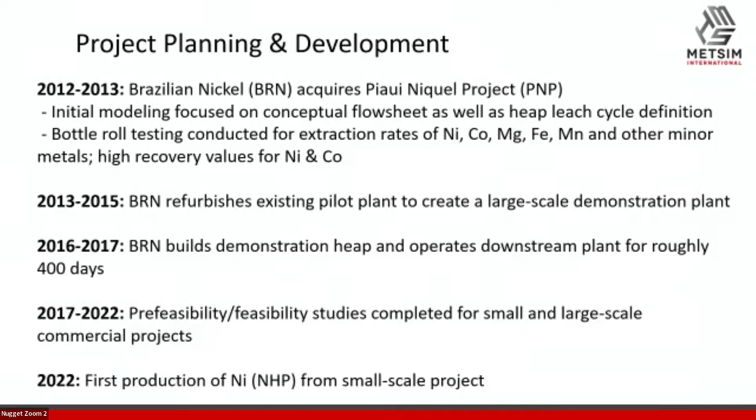And then really exciting news, just 3-4 months ago, first nickel product is NHP. If you're not familiar with that acronym, that's nickel hydroxide precipitate, coming out of a small scale project. So you can see 10 years in the making there, probably right on par with most of our activities.

We've got nickel. So conceptual flow sheet, hopefully that's showing up well enough over there. And yeah, that shows up okay also. Ore handling. So this is the ore handling agglomeration, added sulfuric acid and water, and then stacked it on the heap. Again, 3 different modules, about 10 tons. Next to the heap, ILS, PLS ponds, top them up with water. Sulfuric acid is necessary. And then the PLS.

PLS would pump to impurity removal, mostly looking at iron, aluminum, manganese. So bring that pH up a little bit, drop as many of those impurities as we could while not obviously dropping out nickel and cobalt. Solid liquid separation to get rid of that solid impurities.

Down into ion exchange, separate the nickel and the cobalt, and then each of them went to their precipitation stages. So once again, pH adjustment, precipitate NHP, CHP for cobalt hydroxide, and then send the solution back to raffinate. So fairly standard flow sheet in that regard.

Here is a good aerial photo of the site. This was probably 2014, 2015 when the heap was being constructed.

I see Carlos enjoys that. Probably some good memories for him. He's also up here from Brazil, so welcome, Carlos. We see right in the middle of the screen, and I apologize if you're on that side. I just have a tendency to go that way.

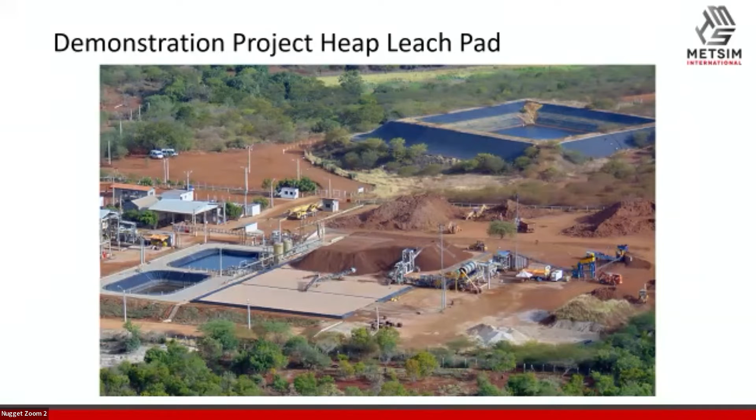So that heap leach cycle that we talked about, this is where a lot of the initial modeling was focused. How are we going to leach this so that we can maximize nickel and cobalt and minimize everything else that's going downstream, right? If you're running a precipitation plant, the more acid that goes down there, the more other dissolved metal that goes down there, the more reagents we're having to buy. So what can we do to minimize that?

Step 1, let's neutralize. So we take the fresh ore after it's stacked and take the most mature solution out of the ILS pond and leach with that. That would be non-acidified. Purpose of leach step number 1 is, as the name denotes, neutralization. We're looking to remove all the acid if possible. And if we're lucky, we'll even precipitate a little bit of iron if we get that acid down low enough. Lower acid, lower iron, less lime downstream. So it's a win-win there.

Secondly, then we'd focus on the primary leach. We would again pull ILS, except this time the ILS is acidified and pretty strong, 50, 60 gram per liter. Those that work in copper heap leaching have no idea what that would look like. So pretty strong stuff. And that reports right back to ILS. So a closed loop on the primary leach. Follow that with a secondary leach. We're pulling from raffinate now, again acidifying, 50 to 60 gram per liter, basically leaching everything that we can, sending that into ILS. And then a wash.

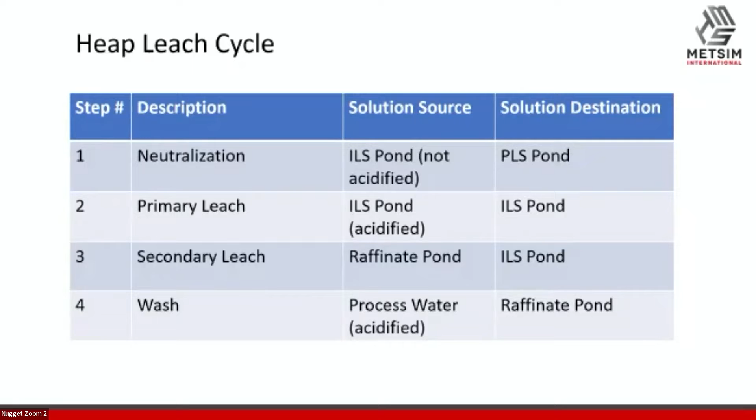If you're familiar with nickel laterites, a lot of people think they shouldn't be heap leached. I remember when our colleague Anne Oxley said they were going to heap leach a nickel cobalt laterite, I said, you're going to build a giant swimming pool. But what that means, there's a lot of residual moisture, 22, 25, 26%. I think we even saw at some points dynamic moisture during the leach cycle. What that means, we've got a lot of dissolved metal in inventory. So process water wash, 5 gram per liter acid, just to keep that pH down. And that would then go into our raffinate pond. So ran that leach cycle on, mostly adhered to that leach cycle for heap 0, heap 1, and heap 2. Heap 0 was a bit of a trial to get us started there.

So we take all this information and we need to put this into a model. It is a flow sheet model, which means we have the main unit operations, the main flow streams, the main chemistry. But what we started with is the ore. Let's get the tonnage right. Let's get the metal and mineral grades correct. And because it was just 10 tons, we were able to very accurately separate and identify what the mineralogy was being stacked. And again, heap 0, heap 1, heap 2, 3 different magnesium nickel ratios, really, so that we could sort of see a low, medium, high, if you will, what we expected from the mine plan. And that'll be important as we move through the model.

Bottle roll test results, we were able to curve fit and get some extraction kinetics, and we'll start with there, then change those as we go. Complete flow sheet, as I said, including individual heap leach drainage streams. We've got 3 active modules, each with its own drainage stream in practice. Within the model, we had a drainage stream also for each module.

Heap leach parameters, the leach cycle I showed, drainage rates, 22 to 26% dynamic moisture - we had to take that into consideration, so we built that in. Then process chemistry from the heap, we're going to focus on that a lot in the coming slides. Impurity removal, product precipitation - that chemistry was controlled by solubility tests, basically solubility versus pH that we'd run at the lab. The 2 last statements in bold are custom algorithms.

That's really what we're discussing here. This is what makes this project unique from a simple simulation model, for 400 days of operation. The modeling team there at PNM and myself really focused on: okay, we've got these extraction rates from bottle rolls from a lab.

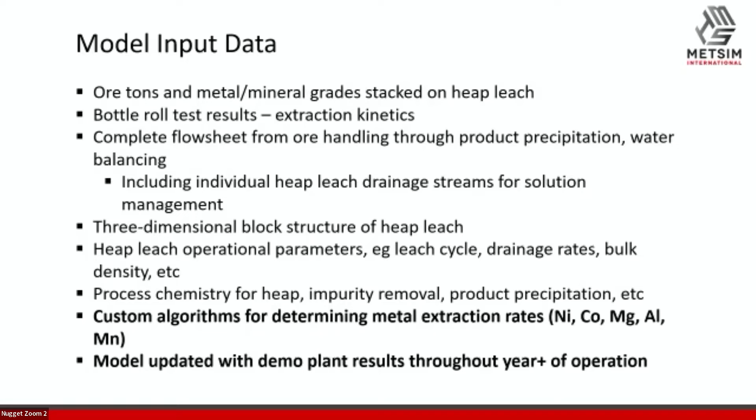So we took heap 0 and we leached it, collected the solution, sampled it, and got a curve. I hope both of those curves are showing up out there. The blue curve represents the nickel tenor, plotted on a scale from 0 to 20. Blue is actual and red is the model result, and we're not forcing that in the model. What we're doing is forcing everything into flow rates, acid concentration, et cetera.

And then we're having a lot of conversations - I like that 4-letter word, work. That's really what went into this: a lot of work, a lot of effort in tuning these. I can't go into a lot of the details on the math of that - that's IP owned by PNM and BRN - but certainly happy to talk with anybody offline about that in any way that I can.

But what we did then - we had heap 0 and said, this looks pretty good. We've got a really good correlation here between nickel coming out, and if we've got the flow rates right, the tenors, a good verification with the actuality. Let's apply those same algorithms to heap 1 and heap 2, because there's no point in calibrating heap 1 and heap 2 - you can't calibrate it each time. We need to take the one calibrated model and apply that.

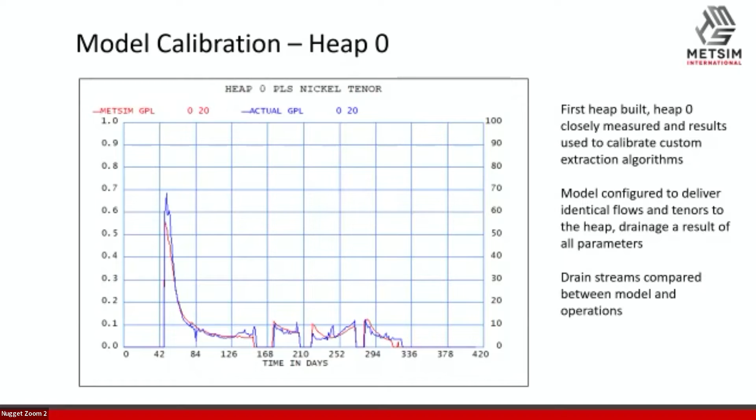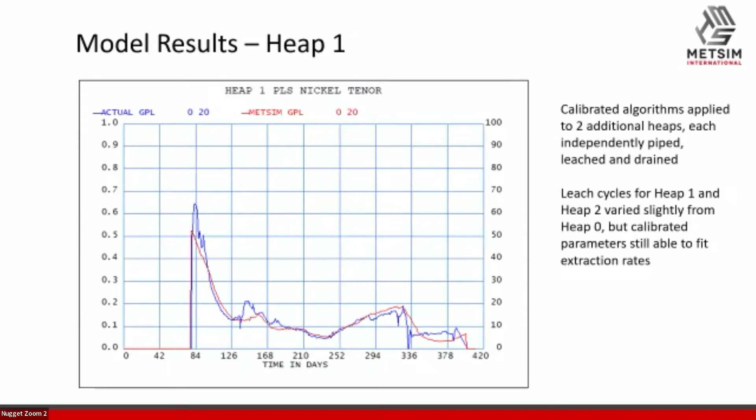So we did. Here we see from heap 1, again blue line is actual, red line is simulation results. Taking those same calibrated algorithms, that same extraction algorithm that we built for heap 0, we applied it to heap 1 - slightly different ore type, lower or higher magnesium, slightly different leach cycle, but the results speak for themselves. Same thing on heap 2, then just one more curve.

Well, we ran the heap 400 days, we're happy with the model, and we took those parameters and those algorithms and scaled them to commercial production. Heap height was built the same as the commercial, about 4 meters. The heap height in the commercial operations is 4 meters - I'm getting a head nod there.

So that wasn't too hard to scale. The algorithm went straight ahead - same application rate, same leach cycle, same plant. So we had a lot of confidence there going in. We then took the annual mine plan, tons and grade schedule that we were able to get for the commercial project, put that on the front of the model and dynamically run that 20 years of operation to get a plan going forward.

We also included site weather data. This is Brazil, but it's the dry part of Brazil. So evaporation - you have a lot of water, it's a problem; you have a little bit of water, it's a problem. Either way, it's a problem. So we got that site-wide water balance nailed down, and we did that as well.

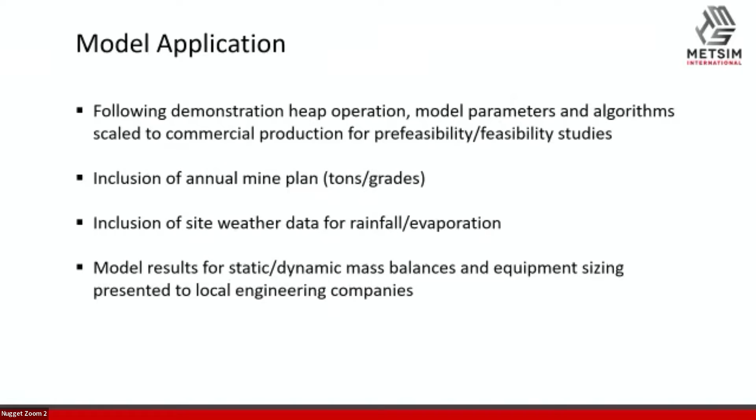And then finally, we had some static and dynamic mass balances. The PNM team was able to do some preliminary equipment sizing with those results, present those to the local EPC down in Brazil, and you saw the history. They're now making nickel. A little bit of verification.

Again, the PNM team was nice enough to give me this graph. I don't know if this is the same one that Mark Smith had up yesterday, but I think it's probably similar, same data source. So this is a little bit of verification of what it is that we're doing. This is about 30, 40 days into operation of leach module number 1 on the small scale commercial plant. This was from April to May this year.

And the purple line there going across 390 days represents the METSIM model's predicted nickel extraction based on the ore that was put in the leach cycle. And we can see the gray line there on the left going out to about 35, 40 days. So very good correlation as we first get started here.

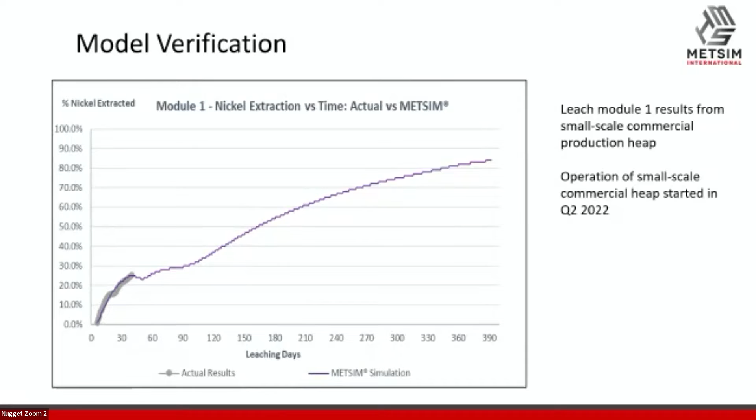Moving forward, what does the PNM and BRN team do from here? Well, we can continually refine the model. Omar and I have had some great talks the last couple of days about that mine plan we thought we were going to have - it's a little bit different. Maybe a little bit more magnesium than we thought, or a little bit less, or just slightly different once you start getting in and roll your sleeves up. So we can refine that model a little bit more.

When you build these algorithms and anything involving AI - I love that term, I work in the software industry - you got to corral AI. You can't just let those things go in any direction. This model is no different. Each of those algorithms that we put in place, they are corralled with mins and maxes, and where they're applicable, we now need to test those, push those further. And that's part of what the team here can do.

Detailed engineering for large scale - that's still underway, I believe. So take that model, continue to refine it on the small scale, and only make that large scale operation that much more robust. And finally, application for additional projects.

I know BRN, they're a great company. They're potentially going to expand. They might be buying new deposits out there in Brazil, looking at nickel cobalt opportunities. Let's take that know-how, those lessons learned from doing this, and apply those to another project. Maybe shave a few months off here and there, shave a few bucks as well.

So that being said, I do want to thank Omar and Carlos for making the trip out here. Also, thank you to Anne Oxley, who brought me in 10 years ago and kept me around. It doesn't happen often. And yeah, thanks to the Philadelphia Eagles for beating the Dallas Cowboys last night.

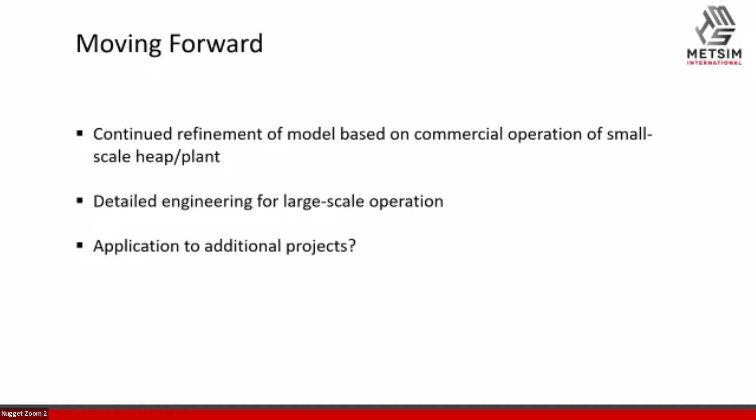So will your modeling be able to, when you go into production, use the model to adjust for the changes in the precipitates that you're trying to get out? Yes, sir, I believe we can. That is certainly that first step there. Now that we have the small scale operating plant, more data, more information, let's expand those boundaries. Let's let it work outside of the magnesium that we had tested on those 3 modules.

So thank you everyone for joining me this morning. I know some of you may have been expecting Nick, I am not him, so I wanted to go ahead and give you guys a quick introduction about myself. I know a lot of you might not be familiar with me. I'm pretty new to Forte Analytical and to the gold side of things. So I was born and raised in Safford, Arizona. Went and got my bachelor's of science in microbiology from the University of Arizona, go Wildcats. I am a third generation miner, which is probably no surprise considering I'm from Safford.

I got my two kiddos - you can't really see it on the screen. There we are. Okay, cool, so I've got my two kiddos, Damien is 11 and Josiah is 15. And the three of us moved up to Colorado from Safford back in 2020 to help start Forte Analytical.

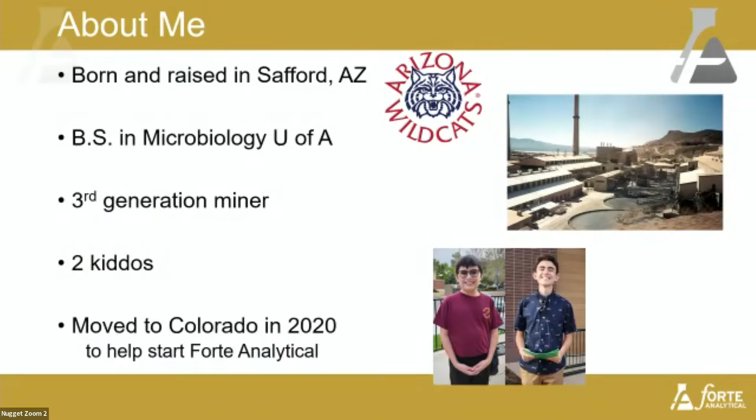So speaking of Forte, wanted to touch on our Forte family. It has recently grown. We have our Forte Dynamics group, which I'm sure you're all familiar with, our engineering and consulting group. Then we have Open Contour, who is going to be our mine design and our modeling group. And just for a heads up, they do have a little demonstration coming up today at 2:00 at their booth over here, so check them out if you're interested. We recently merged with RDI - they are flotation and leach testing in Wheat Ridge, Colorado. And then we have Forte Analytical, we do leach testing and chemical analysis there.

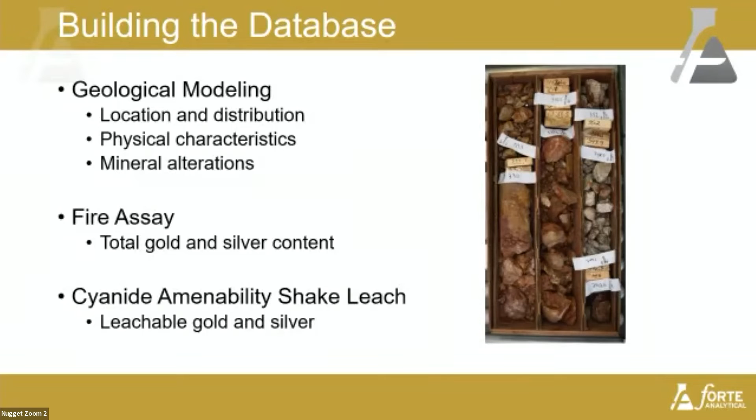So kind of touching on a lot of things that have already been mentioned today with Annie and Ken - they've brought up a lot of these kinds of issues that they've seen firsthand. So going to be touching a little bit more on that stuff, looking at geological modeling initially, looking at the location and distribution of your ore, physical characteristics - so whether you have your grain size, crystal structure, particle size distribution, things like that. Mineral alterations, whether you got free milling or refractory ores. Want to touch on fire assay, looking at total gold and silver content, and then coupling that with cyanide amenability leaching - that's going to be a big one that I want to touch on. That's going to be your actual leachable gold and silver.

Going a little bit further, we want to touch on doing total carbon and organic carbon to look at preg-robbing capacities in your ore, total sulfur and sulfide content, as well as for reagent consumption and other reasons. Of course, mineralogy to look at your clays and other problematic minerals. And then touching on more of the physical characteristics of your ore is going to be your compacted permeability for your geotechnical and hydrodynamic, making sure that your ore can withstand weight, make sure it's able to percolate and all those good things.

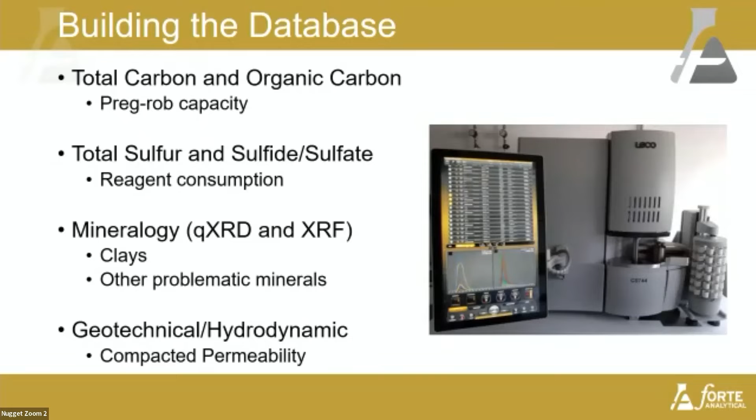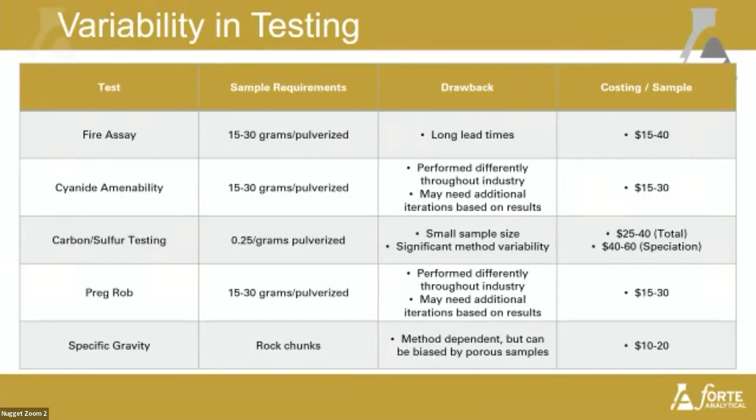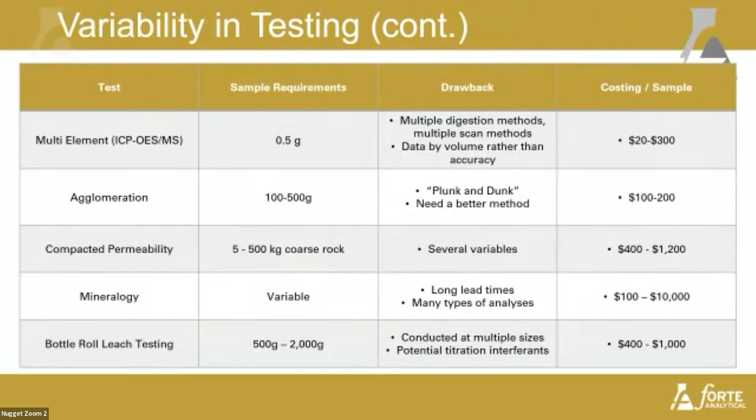Also looking at ICP multi-element analysis. Again, that can vary a little bit depending on where you're looking and what you're looking for. Agglomeration, we talked a little bit about it in some other talks. Compacted permeability also was brought up. So looking at ROM size, crushed material, you want to look at all that. Mineralogy and bottle roll testing can also vary depending on what you're looking for. So I want to jump into some case studies to talk about why this is all very important.

So we're going to look at our first case study here, which is clay determinations, something brought up a few times. So we have our wet screen versus our dry screen here. If you look, we have dashed lines and solid lines. Our dashed lines are going to be our wet screen and the solid lines are going to be our dry screen. Anything at 20% or above is going to be considered problematic, so we'll either have to agglomerate or blend or whatever the situation might be.

Another thing you want to look at is, for example, the orange. I'll try to point at some of them. You have the orange line here and an orange line down here. You can see the massive difference between a wet screen and a dry screen. So you really want to make sure that you understand what you're screening for and that you are looking at both sides of the spectrum there.

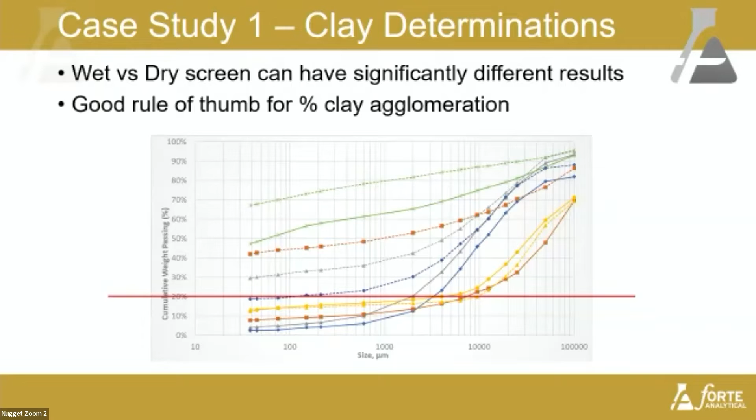This is just a quick thing that we worked on with a client. Basically, this was a question of whether to blend or to agglomerate. Initially, they were planning on agglomerating, but looking at the amount of clays over time coming to the pad, it was determined that it would actually not need to be agglomerated, and the agglomerator was removed from the feasibility study. So, bringing up what we talked about before, you really want to make sure you know your ore and what you're dealing with, how it's going to affect your percolation, your leachability and all that. Make sure you're not blinding off the pad and know how to best deal with it.

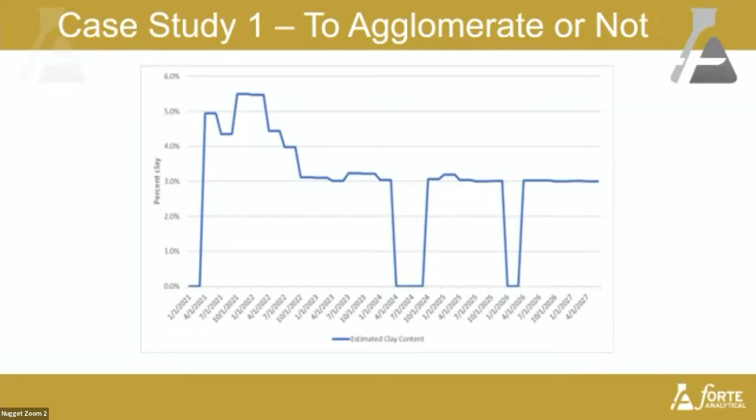The next case study is going to be non-standard analytical. This is where we're going to start talking about our preg robbing, our cyanide amenability testing. Basically, we've done work where we add several different amounts of a gold spike to samples to see their consumption. And we found it depends on the amount of gold available. That will depend on the amount of gold loaded on the carbon. Sorry.

So for any of my geologists or people who are very well familiar with core, a lot of times the organic carbon is determined, I say determined visually, or it can be at least preliminarily decided by visual. So I wanted to bring up here three different pictures of some core that we had. I would like to actually ask if anybody would be brave enough to guess the content of the first one all the way to the left over here.

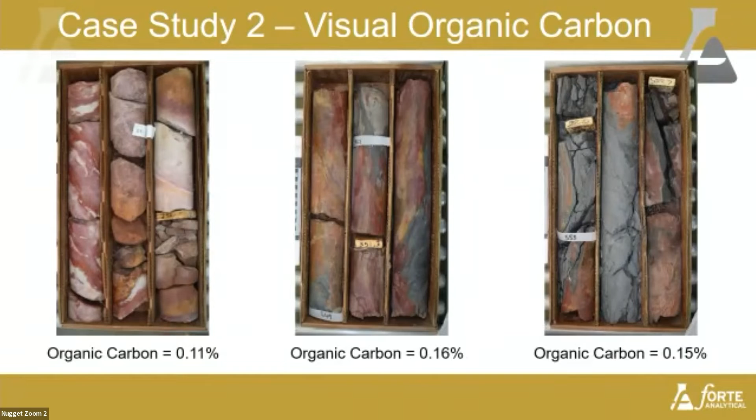We're going to jump into case 3, which is actually going to be with Fiore. So a lot of this was kind of touched on this morning, but that was a good preface to all this. So we did some work with them where they drilled 15 PQ core holes back in 2020. They did the full length of the deposit. There was 6,201 feet drilled with a total of 1,366 intervals tested.

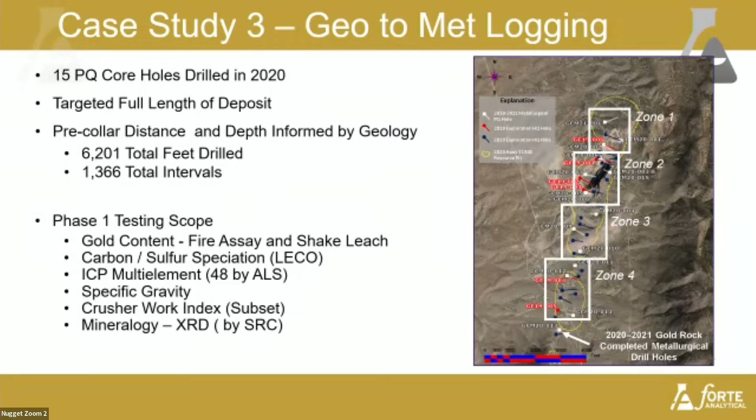So we broke this up into phases. So phase one, we did all the things that we said we should do. We should do fire assay, cyanide amenability, look at your carbon, look at your sulfides, look at your elemental sweeps, specific gravity, crusher work index, and mineralogy.

With looking at all these things, Fiore has this 4-digit code that they're able to come up with to kind of look and distribute their ore. So you can see that right here in this bottom half, it's going to be based on your formation, your lithology type, your primary alteration, and your redox state. So looking at that, we were able to code the types of ore very easily once we had all the analyses put together. And I'll show you some graphs on how well that correlated.

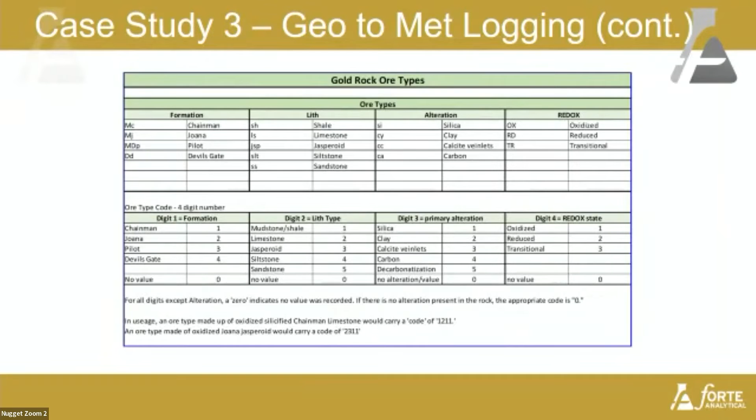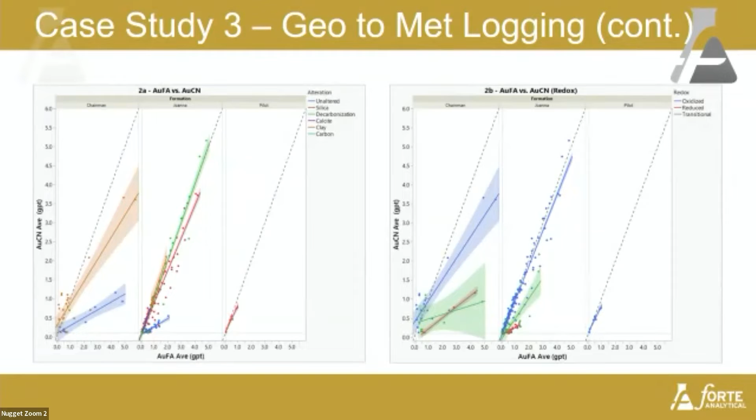Another thing that we looked at was modified shakes. So again, this is a really big issue in the industry: everyone runs a cyanide amenability shake very differently, whether it's a hot shake, 24-hour shake, 1-hour shake, inverted shake, orbital shaker. I mean, the list goes on and on. So this is just a quick reference of how different things can be run.

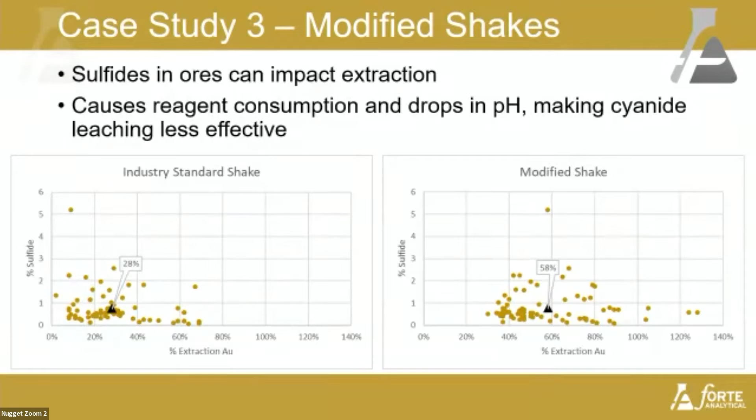So what we did is we did the same exact samples in duplicate, but we monitored pH throughout before adding cyanide and continued adding lime until the pH stabilized at 10.5 over time. Once it stabilized, we added our cyanide to the solution and we ended up with a higher recovery of 58% on average. So this is a good demonstration of you knowing your ore and how to actually run the test. When you get the test numbers, what do you do with it?

So that's really the main goal here. All right, mine's pretty quick, I hope.

So the summary here is to make sure that you consistently monitor your samples from start to finish. Your logging from geological to metallurgical is very important. Taking the time up front to build your database, do your test work, that good work thing, right? You've got to put in the work. You've got to do your testing. You've got to know what you're working with. And that way you can hopefully reduce some of the unexpected issues down the line.

Make sure to, like I said, capture and run tests from start to finish. Understand the different types of testing and what numbers they produce. It's great to run an AA and get some numbers for gold. What do you do with that? How do you move forward with that? What does that mean to you?

And then appreciate that each sample, each site, each ore has its own quirks. It's going to need its own database. So make sure that you take the time to do that for each ore that you have. And that's it for me. Any questions?

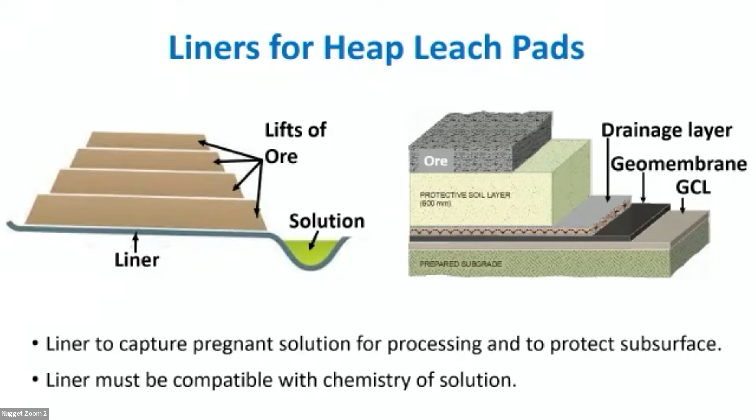And that liner may be constructed out of a geomembrane, a high density polyethylene sheet, a geosynthetic clay liner, a thin factory manufactured clay liner, or typically a combination thereof, where the two materials work together as a composite to create an extremely low leakage rate, minimizing any loss to groundwater and maximizing our ability to recover the solution. For that to work, though, these materials have to be chemically compatible with the liquid that we're trying to manage. And that really is the essence of these bentonite polymer composites.

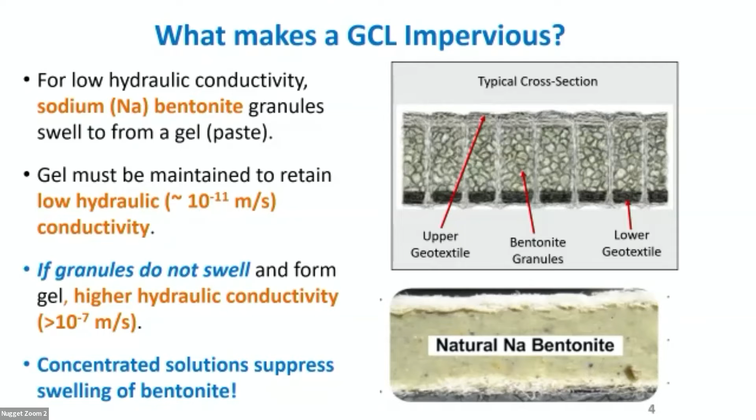And what's particularly important is that the swelling of these tends to be suppressed in high ionic strength solutions or concentrated solutions. Also, solutions rich in divalent cations or polyvalent cations will also suppress swelling, things that we would commonly find in a heap leach solution.

And just to illustrate this, I did a couple of examples here. I took the bentonite that would be in a GCL, again, about 4 kilograms per meter square granular bentonite, took that mass per area out, put it inside a Proctor mold, 100 millimeter diameter mold, and it's about 6 millimeters thick dry, so a thin layer at the bottom. And then we pour the solution that's going to be hydrating it on top of that. And we watch it swell.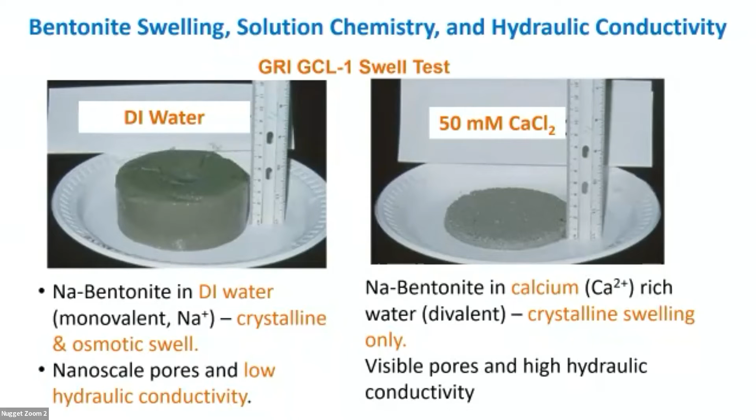So we were looking at materials that we could use or add to the bentonite to create something that would work under a broad range of geochemical conditions, from dilute monovalent solutions to concentrated divalent polyvalent solutions. And we stumbled on, actually by a mistake we made in our laboratory about 15 years ago, that by adding small amounts of hydrophilic polymer to the bentonite, we could actually create a composite material that would function over the entire range of conditions.

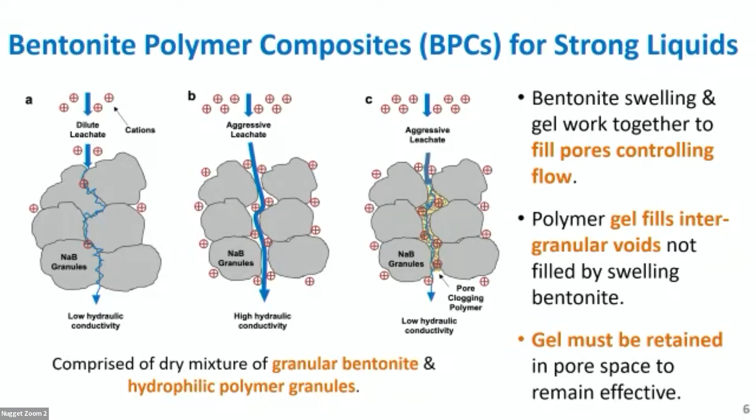And that's what gave birth to the bentonite polymer composite geosynthetic clay liners that are on the market today. So we had used these for a number of applications, largely in other types of mining applications and coal combustion residuals, some other types of hazardous waste where we had strong liquids, but we hadn't used them in this particular application. So we studied it in this particular project to evaluate how it might work, particularly for acidic copper heap leach solutions.

These two are blended together using a screw auger. You've got a screw auger and distributor bar on an assembly line. You've got two geotextiles that are running across with the bentonite and the polymer being laid down in between. They're brought together and then they're needle punched to create that carpet-like product that you saw earlier.

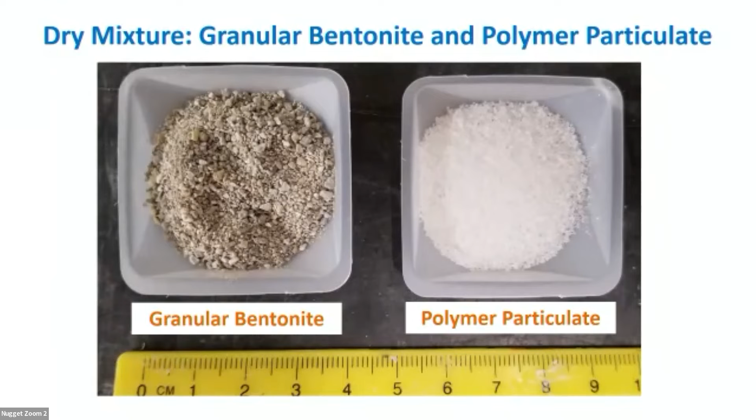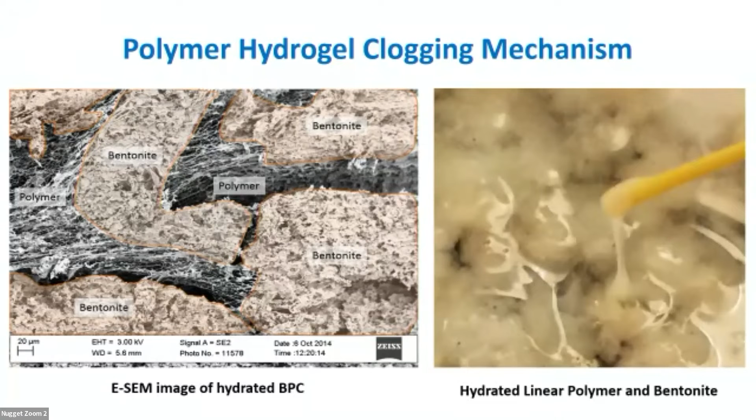So we wanted to evaluate how well they would work for a copper heap leach solution. So we took 4 different commercially available bentonite polymer composite GCLs. We created a synthetic solution. I'll show that on the next slide.

We ran the tests under 2 different conditions. A low stress test, which is pretty typical in practice, it's conservative. And then a high stress test where we actually put a high load on the GCL first and then began to permeate it, simulating more like what we might see in the field, where we build a liner, we put the ore on top, and then we begin leaching it with that overburden pressure in place. And we ramped all the tests up to 600 kPa to simulate different ore thicknesses that we might run into in the field.

These were long-term tests, something I'll come back to at the very end. We started these 2 years ago, and we're finishing the last ones now. All right, so they've run almost 2 years. Most of them took about a year to complete. So these are really long-term tests that come to geochemical equilibrium.

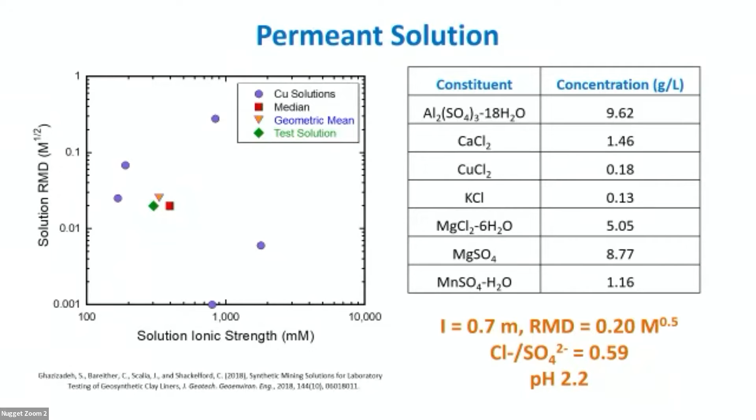And this solution was about 700 millimolar, so pretty concentrated. It's got an RMD of 0.2. RMD has weird units of molar to the 0.5, but that's a divalent solution, not surprising given the geochemistry of the constituents in our mixture. It's sulfate predominant. The anion ratio of chloride to sulfate is about 0.6, and then it's acidic as we'd expect. It's pH 2.2. And we ran these tests, as I indicated. We started these about 2 years ago. Most of them took about a year, some took up to 2 years.

What did we find? First of all, we did tests with a conventional GCL and with 4 of these bentonite polymer composite GCLs. The first thing that we found was with the conventional GCLs that they were very permeable. The solution is just too strong for conventional bentonite. So a conventional GCL that you could buy from a manufacturer is not going to function in this application.

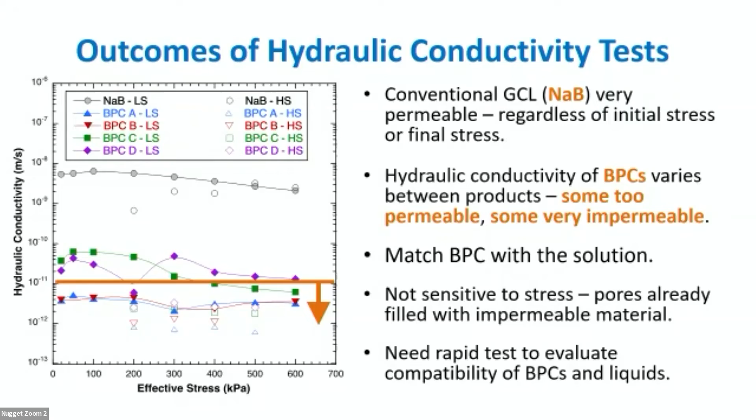One of the challenges with these tests is that they take forever to run, literally a year to get a test to equilibrium. Some are taking 2 years, and not too many projects I'm involved with want to wait 2 years to get a test outcome. Usually somebody's asking, can you give it to me tomorrow?

We've been working on some index tests to be able to do that. A swell index test, which is conventional for sodium bentonite GCLs, turns out that doesn't work very well at all. The one we use for conventional GCLs doesn't work.

We've been looking at this active water content test as well. We'd like something we can run in a couple of days to get a sense of whether it's going to work or not. We're not quite there yet, but this active water content test does seem to be a discriminator, whereas our swell index test just gives us a bunch of noisy data.

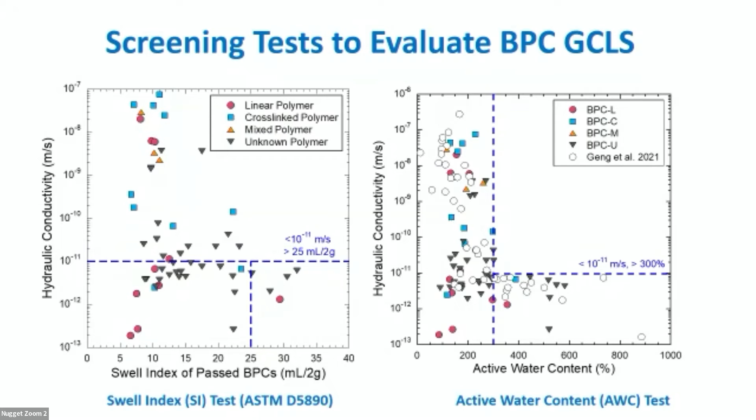So sometimes you'll see in the literature people suggest using a swell index test to run a quick experiment to determine whether these materials will work, and just a caution, they won't. But we're working on some index tests that will. So, key takeaway messages: the conventional GCL is strongly influenced by the geochemistry.

And really they're too permeable for heap leach solutions. The BPC GCLs can work. We want to match the GCL with the solution. We're going to have to do testing to demonstrate that it works, and be prepared.

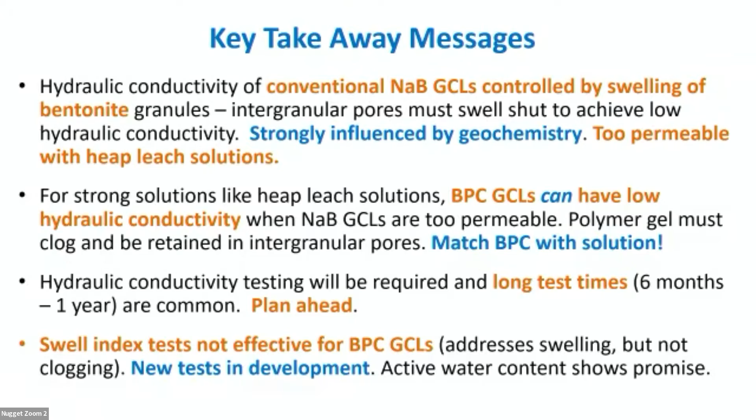It takes a long time if you're going to be using these materials. Six months to a year is not uncommon. And hopefully in another year or so we'll have some type of index test that you can run on the bench in a couple of days and get a good sense of whether it's going to work, to justify a test that runs for a year to find the outcome.

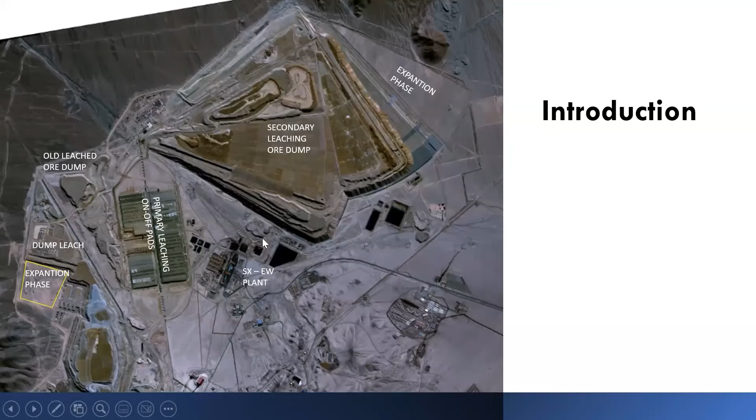The methodology used to determine this possibility was the large-scale puncture test, developed in collaboration with the Laboratory of Geo-Logic Associates from Grass Valley, California.

I won't go into detail about this test since it's probably well known. These tests are commonly used to evaluate the capacity of the liner under vertical load, checking resistance and whether there is any puncture.

Importantly, the test was initially developed for an equivalent height of 120 meters. We took the overliner samples, the same overliner samples they were trying to use, and placed them at a density of 1.85 tons per cubic meter and a moisture content of 3%.

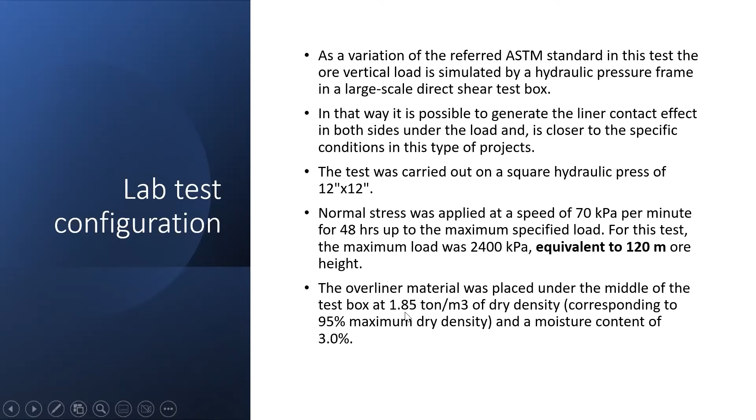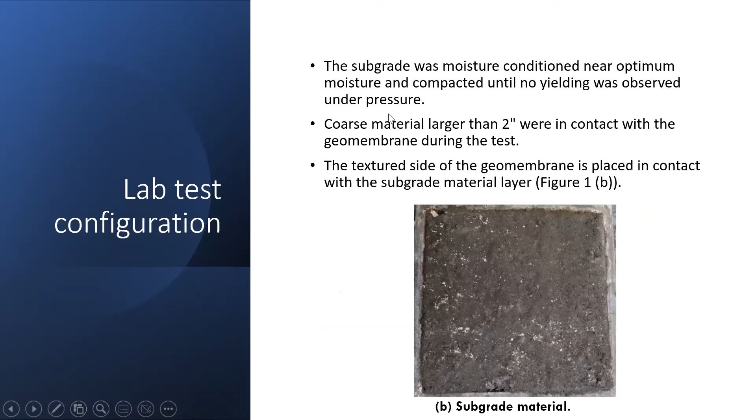Subgrade conditions were prepared so no yielding occurred under pressure, and coarse material larger than 2 inches was in contact with the geomembrane during the test.

For the first study, related to increasing the oversize material content of the overliner, this was because the additional source of materials presented a coarse overliner size between 2 and 3 inches, while the project was originally specified for an overliner with 1.5 inches as the maximum particle size.

So instead of evaluating the cost to process the material down to a maximum size of 1.5 inches, the idea was to see if it's possible to use it just as it is, considering they had approximately 40% of coarse material over 2 inches, which would mean a high cost of selection processing.

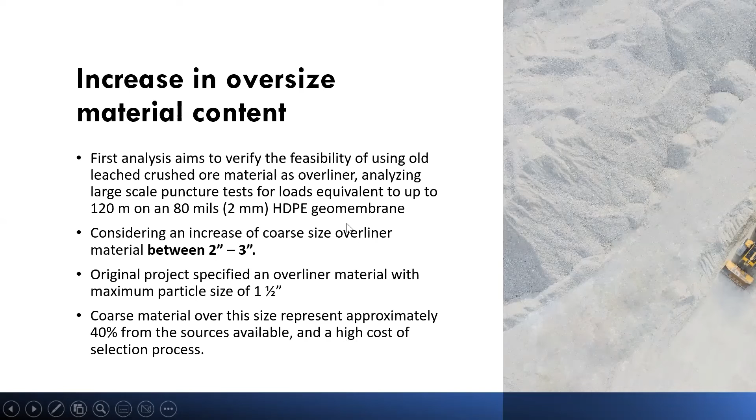So we tested, for 120 meters, which is the maximum design height, whether the 2 millimeter HDPE geomembrane is able to avoid any puncture. The test was run with restrictions allowing material over 2 inches at just 5% coarse content.

In this case, the material had 16% passing under 200 sieve. This is probably not an issue because the material was considered only for protection, not necessarily for drainage in this case.

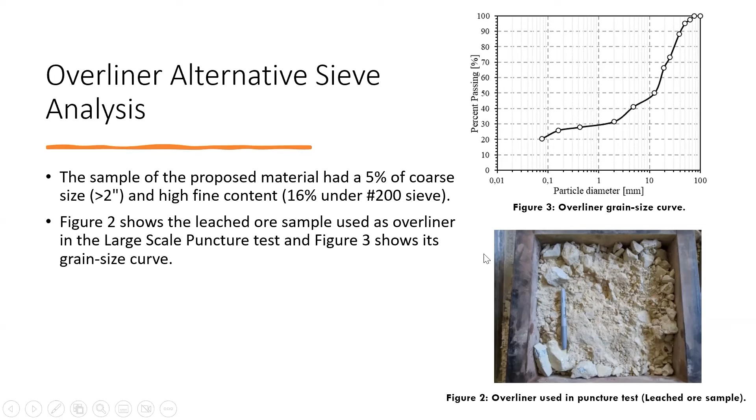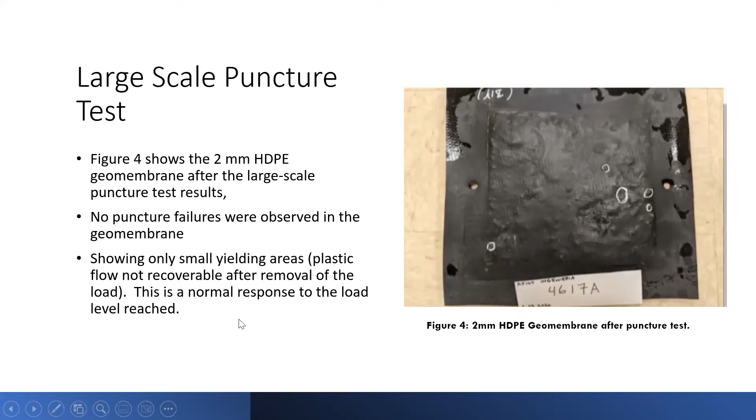Here is a picture of the sample in the box for the large-scale test. The results show that for this 2 millimeter HDPE geomembrane, no puncture failures were observed, only small yielding areas, which for us is a normal response at the load level reached in this case.

In the second study related to puncture resistance versus load increase, the operation looked to reuse abandoned phases of the deposit to load additional fresh ore. The objective was to determine the maximum height of the leach ore deposit that can be reached to avoid damage in the liner system and the drainage pipe due to overload.

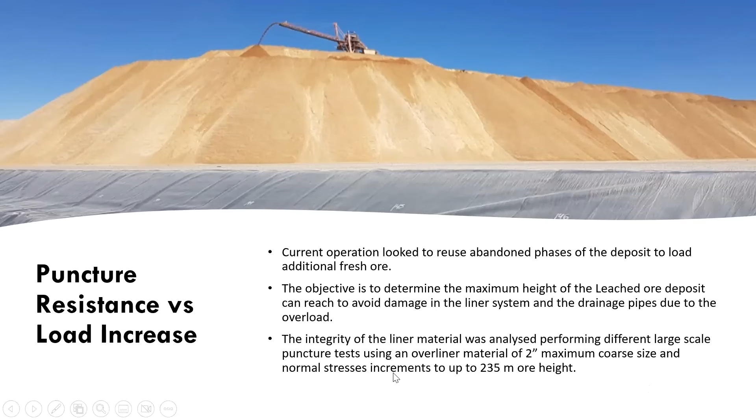The integrity of the liner material was analyzed, performing different large-scale testing using the overliner material of 2 inches maximum coarse size in this case, and normal stress increments up to 235 meters of height.

In this aerial view, we have the deposit and the operation that are starting to put additional layers of the leach ore here.

To do that, we took the most recent topography and compared it with very old information about what was the original configuration for different phases. We are talking about 6 phases here, with different types of thickness of geomembrane that was built.

In this case, between 1.5 millimeters, 2.5, 2 millimeters, and 2.5 millimeters in these areas. Over this was projected the additional layers of leach ore to put in there, with the stability analysis also determining the maximum areas that were possible to do it without affecting global stability, and determining the maximum heights for different areas and thicknesses.

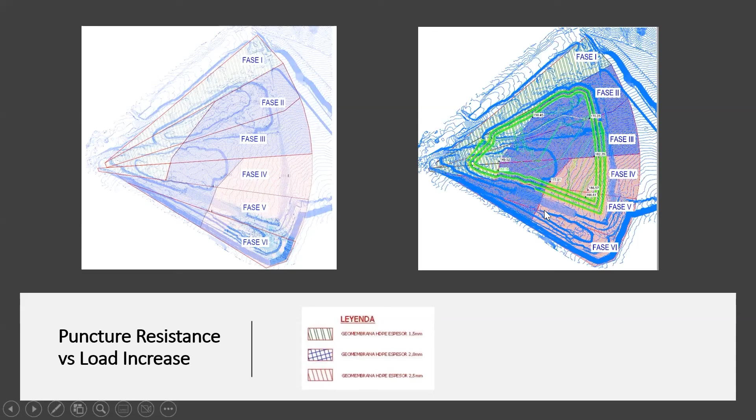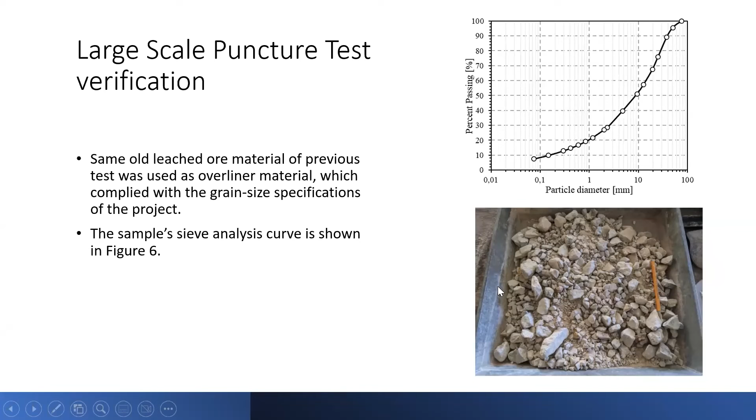We performed the different tests for this different stage, using the same leached ore material as the previous study, just taking into consideration the maximum 2 inches as the maximum particle size. This is a material that looks very, very aggressive in contact with the geomembrane.

And the results for each stage are the following. For the first, we have between 140 meters to 165 meters for each of the thicknesses. The results showed mild yielding and no puncture was observed.

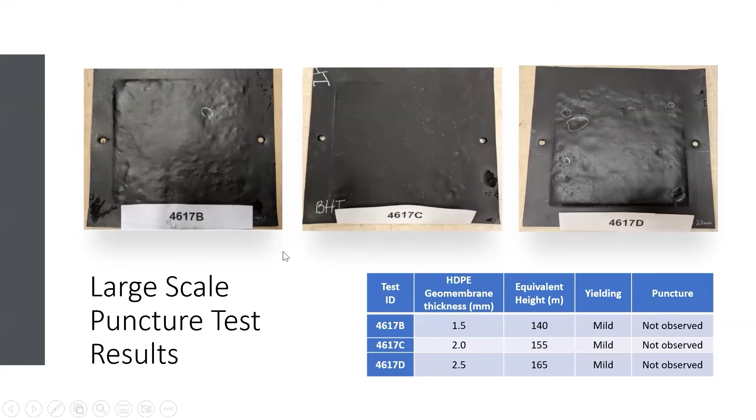In the second stage, we are talking about heights between 185 and 180 meters for 2 millimeters and 1.5 millimeters. Results show mild to moderate yielding in this case, as you can see in the pictures, but no puncture was observed.

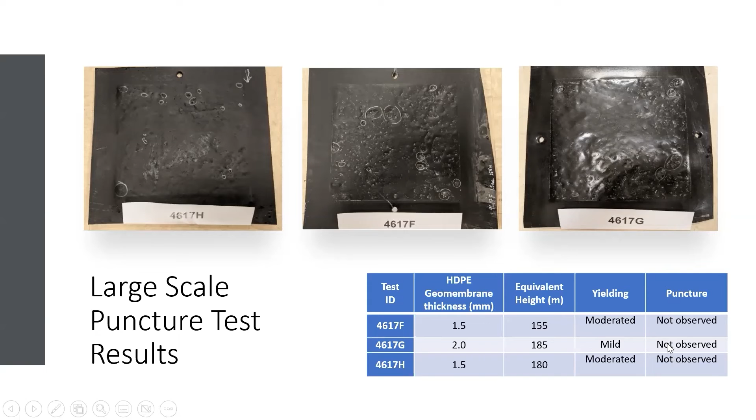And the final stage, more than 200 meters, in this case 235 and 225 for 2 and 1.5 millimeters respectively, major yielding was observed, but no puncture was observed as a result. That was a surprise for us because actually in this test we were looking for the maximum height to try to get the puncture failure, and it was not possible.

So we ended the test at this point.

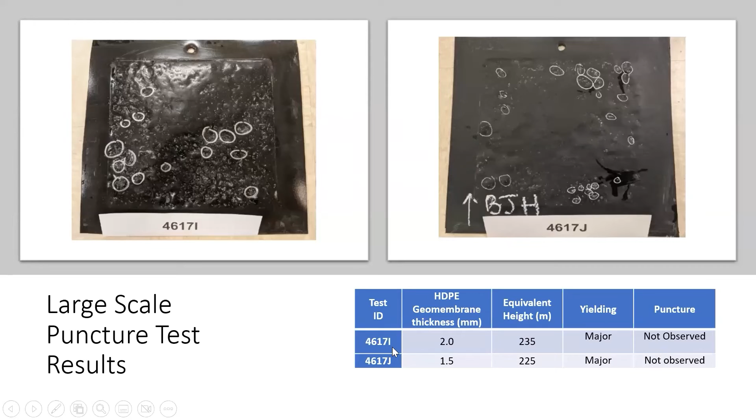Conclusions for this case were: in the case of the first study, for 120 meters maximum height and 3 inches as maximum size of the overliner, this will not generate punctures for that type of geomembrane. But for that, the portion of 3 inch coarse size should not exceed 5%, retained on the 2 inch sieve, and the material must be well graded with sand and gravel content to avoid migration of fine particles from the ore during the leaching process.

In the second study, the puncture test results showed for a height of 185 meters for 2 millimeters, and 180 meters for 1.5 millimeters, mild to moderate yielding, and did not generate any puncture failure. Over 200 meters, major yielding was observed, but no puncture was observed in that case, which actually surprised me.

So basically we proved that it is possible to reconsider the paradigm about the typical specifications we use for projects in terms of overlining and protection of the geomembrane liner system. Also, when natural sources are not available, alternatives such as waste rock or leach ore can be used as a proven option with less selection process and costs.

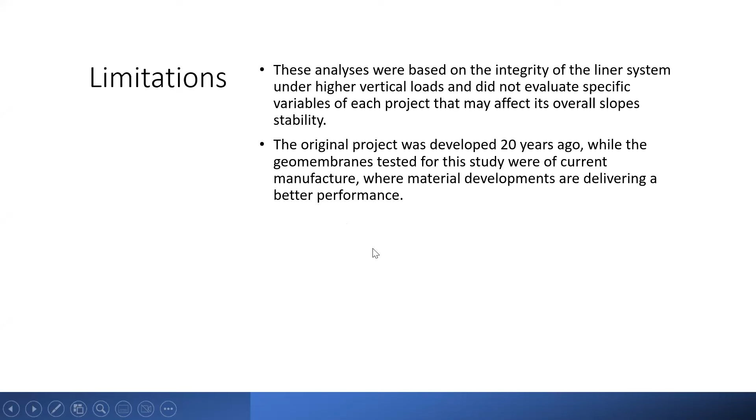And the original project was developed 20 years ago, while the geomembrane tests for this study were of current manufacture. So there's a probability that material developments are delivering better performance than before, I mean than 20 years ago.

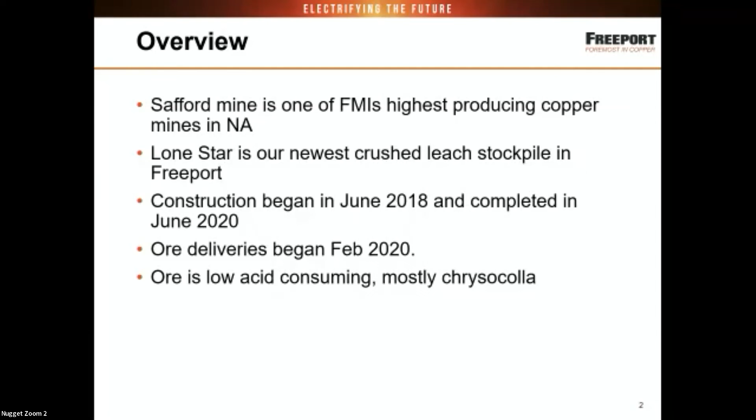The ore is very low acid consuming. It's oxide, mostly chrysocolla, so our best recovering ore. So previous ore at Safford has been high calcite, high acid consuming, all the gangue acid consumption predominantly from calcite. Yes, we had good grade, but the biggest proportion of acid consumption was the gangue mineralogy. So it's mostly andesite mineralogy.

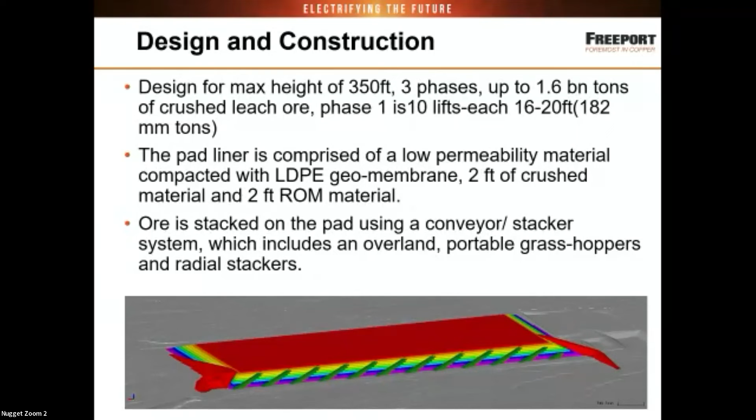Excuse the shaky hand, I apologize.

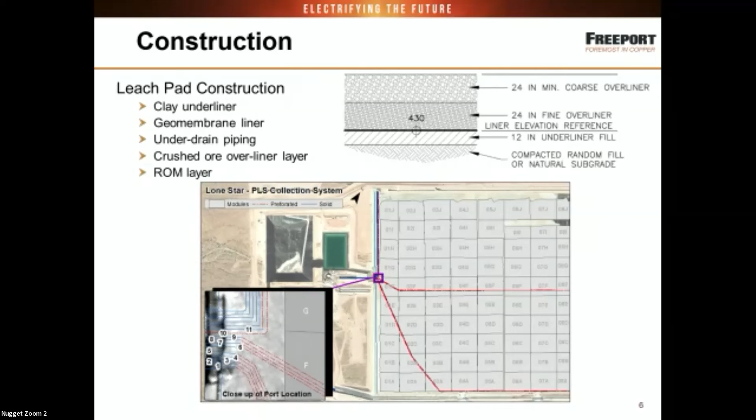When we constructed the new pad, we used pretty much all the old conveyor system and added a couple of pieces. Pretty much everything was reused. So the PLS exits the pad and converges into a sump with underdrains. Then the flow goes to the PLS tank, as I already said. And in an upset condition, the PLS can overflow to these containment ponds. This is the process solution. This is called the stormwater pond.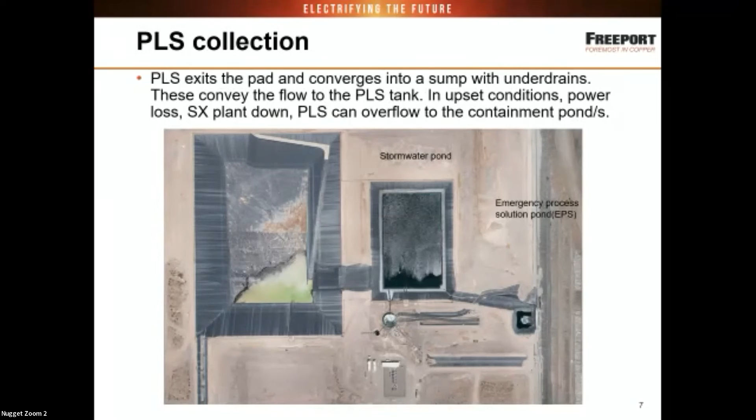So, let's see. So under the pad we have, can we back up one slide, please? Under the pad we have a series of 4 and 6 inch diameter perforated piping, which collects the solution, and it conveys to bigger piping at the front of the pad, and it's approximately, I think, 24 inch piping at the front of the pad. Can we move to the next one, please?

So as we saw, the 2 big storage ponds are designed to contain a 100-year rain event. And Safford is zero discharge facilities; everything that touches our process is recycled in some way. The system we had designed around the pad channels stormwater around, so it doesn't contaminate our PLS or dilute it. And also the turbidity that rain would bring with it is also channeled to the ponds, so it doesn't affect our process. And then in those upset conditions, we'll store PLS, turbidity will settle out, and we reuse that water as we need back into our process.

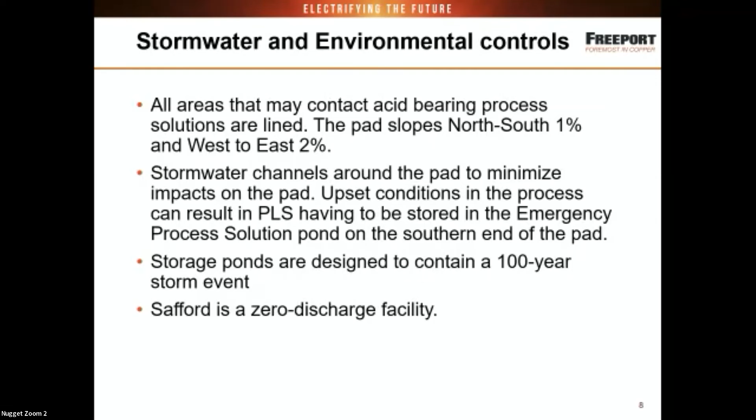The pad has a slope north to south of 1% and west to east of 2%. And that helps with our drainage. Let's move on, please.

Moving on to operations and stacking. The ore is crushed to a P80 of 0.58. We agglomerate with acid and water, so sulfuric acid, hence the need for the acid plant. And then the ore is conveyed to the pad, stacked east to west. And in preparation for stacking, we strip, we rip, and prepare the area. And we do other activities, which we'll talk about later.

The surface is slightly graded, and we use it. Everything is low ground pressure equipment. Nothing over 5 psi goes onto the pad, for obvious reasons; we're all familiar with compaction and porosity, which affects copper recovery, etc. And we'll talk about the geotech constraints a little bit later.

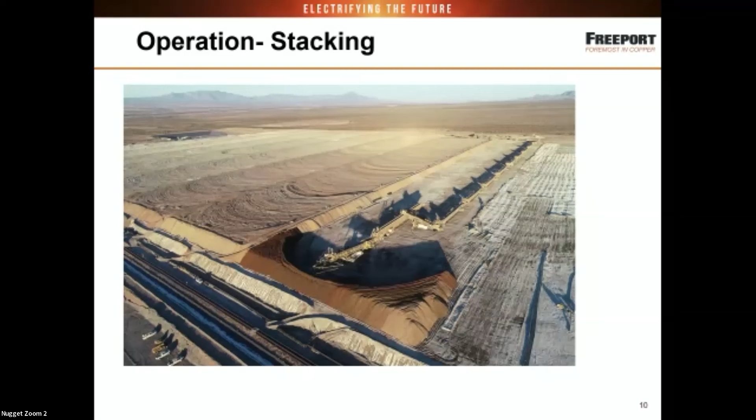Okay, next one. So here's an overview of the stacker. As you can see, it comprises radials, and then we also have typical grasshoppers, and then you have a radial at the end. And we radially stack and we retreat stack so that we don't compact the ore. And the ripping is done at the very last minute, right before the stacker goes over the ore. It's a typical arrangement. I think you're all pretty familiar with this. Move on, please. Again, here's a little bit more detail with the stacking equipment identified.

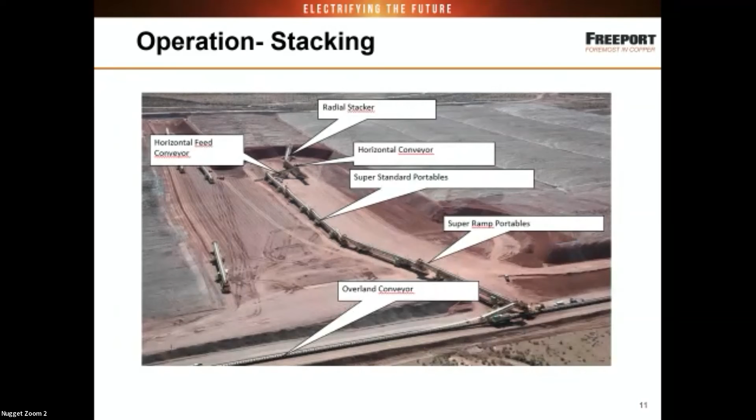Next, please. So as regards leaching, phase one of Lone Star operates to a maximum flow of 36,000. Initially, we started at that. Obviously, due to lift constraints, as the pad gets slightly smaller each lift, it has declined slightly. A recipe for leaching the pad is actually in my paper. It's not in the slides, but was determined through several phases of column testing, during which we identified improved acid consumption equations compared to our original pad, which was obviously a very high acid consumer, and we had to compensate for the calcite that was in the pad.

We identified our optimal lift height, which is typically 16 to 20 feet. We started our first lift at 16 feet, but we included the 4-foot ROM overliner and made the decision, based on column testing, to leach it all at once. And we didn't pre-neutralize our high acid consuming or potentially acid consuming ROM layer. It was very successful. We'll talk about that a little bit later.

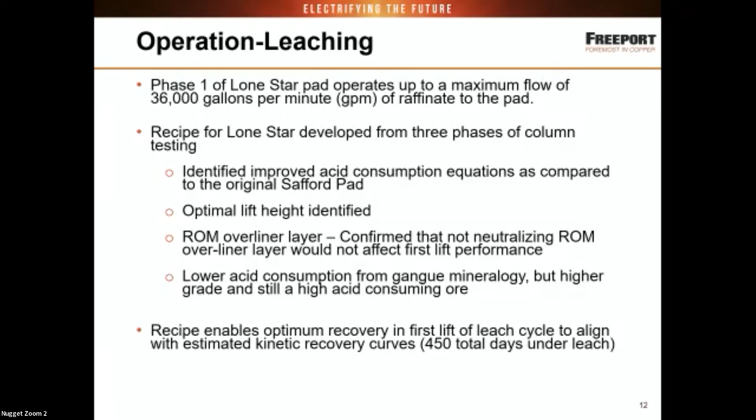This time, obviously, lower acid consumption from gangue mineralogy, but we have a high grade, so it's still a high acid consuming ore. There's virtually no calcite in Lone Star ore. We hardly ever see more than a fraction of a percent. So the recipe enables optimum recovery in our first leach cycle, and it aligns with our kinetic recovery curves, which is a total of 450 days.

Next one, please. Here's a typical example of our leach pad layout. We started with 18 cells. Currently, we're at 17 cells, working from south to north, cell 1 through cell 17, and then modules A through J or A through K. And we're currently at 10 modules wide by 17 cells north to south.

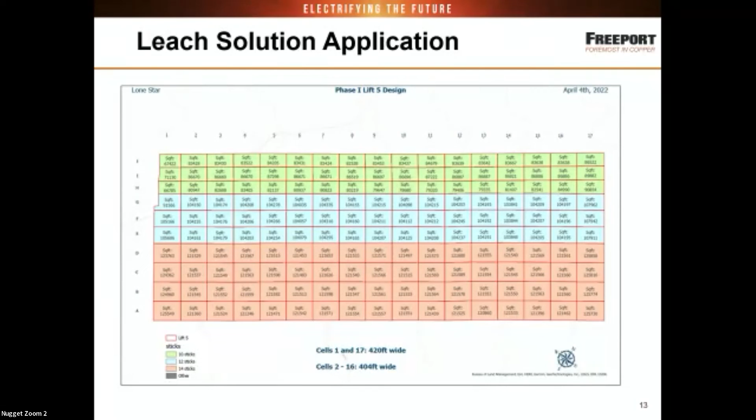radio controlled. The main feed lines are 12-inch HDPE feed lines with a dummy line on the other side. The 4-inch PVC actually connects the modules and the skids together. We use drip line to feed north just across the pad. Module sizes were optimized based on previous flow testing and operation to ensure even flow across the area. And module flow feeds from the center, from the skid onto both sides, so we get more even distribution than feeding from one side.

Let's see. Everything's battery controlled. Obviously on the leach pad, you're familiar with that. So we're able to control the flow and monitor the flow all remotely by radio communication. We have 2 radio systems, one for the flushing system, one for the instrumentation system. We flush every valve on our flushing system twice a day to ensure no plugging. By doing this, we've been able to run much higher turbidity through our SX plant and to the leach pad without having significant plugging events.

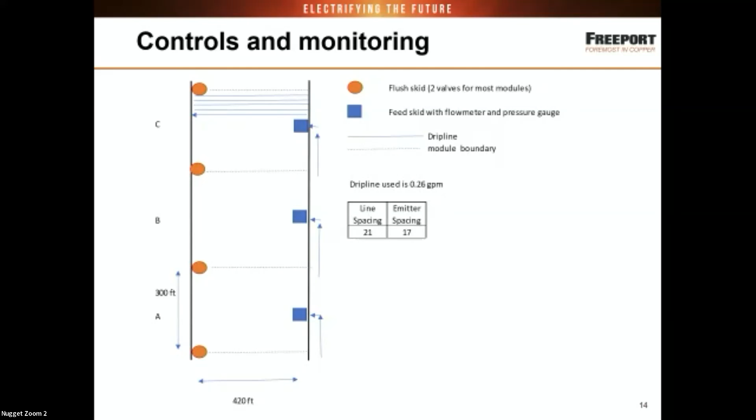So flushing quality and solution application rate is monitored daily and during the shift by our water balancing crew using tablets. And they can adjust the flow in the field using the tablet information so that they can dial this in to be this accurate. And they're given the quality score each day, and they're quite focused on their quality scores, by the way. It's a good metric.

At the same time, we also generate a geotechnical report, which shows anything that's not acceptable from a geotechnical perspective based on our geotechnical KPIs. I'm not going to go into these in this presentation, simply because another group is giving a separate presentation on that. Any modules that have high application rates that could be a geotechnical issue are immediately corrected that day. And then to prevent preferential pathways or channeling in the stockpile, we step up all our flows incrementally day by day. So it takes us typically 4 days to get to full application rate. That's so, obviously, you don't have channeling.

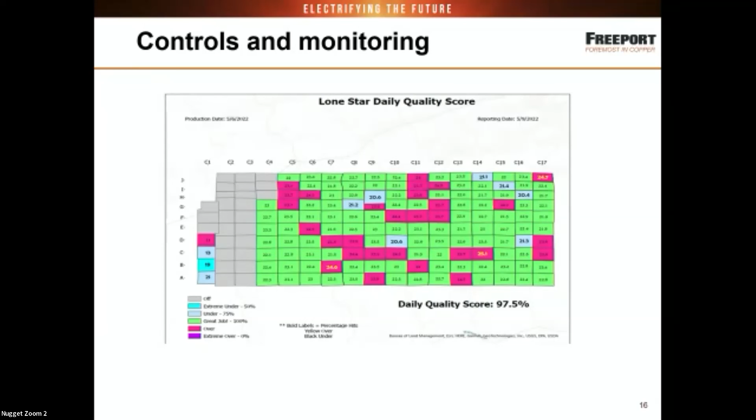That goes back into our GIS database, and we can actually pin down our grade, P80, lots of parameters based on what was stacked there. So it's very useful for doing our recovery drilling. We don't have to put a drill on before we leach because we already know what's stacked there. Drilling requires a permit. We don't allow a drill on the pad unless there's a good reason. And again, it has to be low ground pressure.

Let's see. We have a belt cut sampler that is between crushing and agglomeration. So we're able to get very accurate P80s and mineralogy. We take bucket samples or belt cut samples every 2 hours and average those. So we have very fine detail of what was stacked on the pad in a given area on a given day or given shift. So, okay, thank you. Move on.

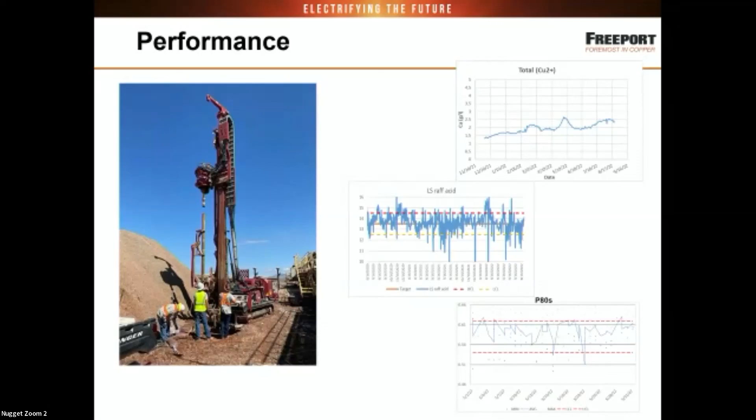So geotechnical monitoring, again, this is super high level. I'm going to gloss over this real quick, but the stability of our heap is monitored using a combination of different factors. Obviously, we use piezometers, which monitor pore pressure, indicating solution level. We have survey monuments and GPS units to detect displacement. We have ShapeArrays to monitor our subsurface movement. And we also use InSAR, which compares satellite images to monitor displacement.

We monitor all of these daily, and reports are generated, and a large group of people review them. So we're very, very closely monitoring our stability. Thanks.

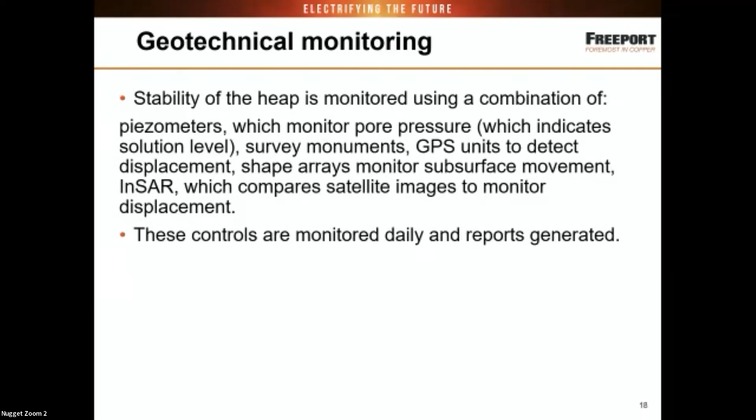So successes and learnings. I'll tell you what the chart is first. This just shows when we were moving from Safford pad to Lone Star, solution balance is really super important. You're turning off an old pad, you're bringing on a new pad with a very fast reporting time. So you've got to watch your solution balance and plan ahead accordingly. We did a pretty good job of that, which I'll go into.

But the two important lines on this chart to look at are the two solid lines towards the bottom. Those show the flow delta between RAF and PLS. You see where it goes negative? That was a huge solution outflow from the old pad that had to be contained at the same time as we had new solution coming out of the new pad. So we had many, many learnings and successes during lift one stacking and operation. The first one I'm just talking about was the water balance.

So you have to really anticipate what that looks like and take some good estimates and have sufficient storage for that excess PLS so that you can put it back in process and utilize it. We obviously had pretty big ponds. We planned and we coordinated really well for that. We also supplemented with diesel pumps so that we were able to bring that solution back and put it where we wanted to.

So as I said before, the leach pad started in February. So that was well ahead of the monsoon season in the Southwest, so it was pretty good timing. So it was good planning on our part there too.

And then fresh water, something else you need to really consider. If you're going to be putting in a lot of makeup water, you need to start early and you need to have enough wells drilled, planned ahead in your long-term planning for a new stockpile. Again, we were ahead on that game too, so we planned really well for that.

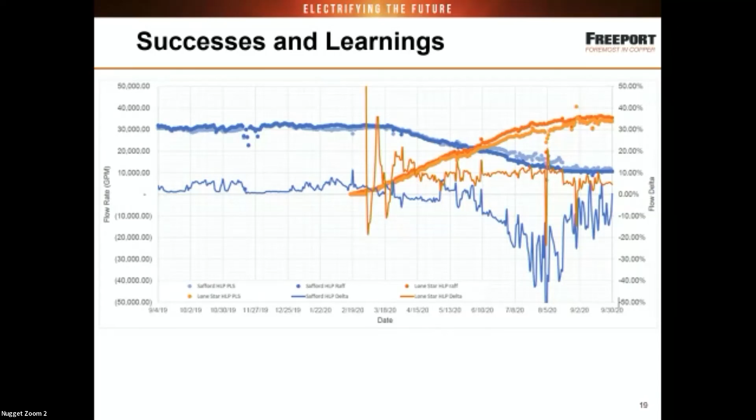So whilst establishing the first lift of crushed material, the stacker started having some lateral stability issues. As it's moving over the brand new ROM and stacking new material, the stacker tracks were becoming misaligned, and then they were tripping out on their safety factors. So then they couldn't stack. And this was happening so often, it was multiple times a shift.

So we ended up working with the leaching, coordinated with stacking, and we all collaborated. And we actually put skid steers out on the pad. We had people around the clock watching and actually moving these big boulders and making things how they should be so that stacker didn't have these problems. So we were able to successfully get through that initial lift and those issues with the slightly bigger ROM material than we had planned for. Ground observers, 24-hour ground observers on the ground.

Okay, acid consumption. So your acid consumption and downstream effects need to be considered. For an oxide copper deposit, our PLS was expected to have low initial acid because of our column testing that we had done. We really anticipated that, especially also since we were neutralizing that ROM layer, we figured we might be really low on acid.

As it so happened, it really did not use as much acid, and we had more free acid in our PLS than we expected, which resulted in lower pH, which in a copper extraction, that's a negative. You don't want to have low pH. So we had to compensate in the SX. And again, we collaborated with the SX people. Yes, we saved on acid because we didn't have to add so much, but we had a little bit more extractant so that we could compensate in the SX.